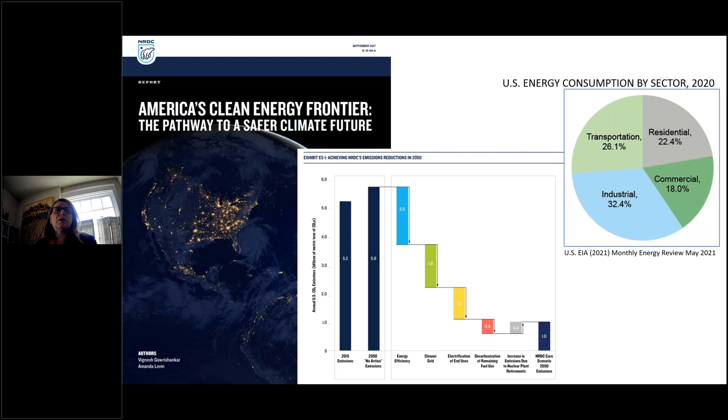So 90.2 is the residential code, or standard, and that's the pie that we're looking at. You can see it is very important to the overall greenhouse gas and climate change initiatives that our country and actually the globe is working with.

If you look at our energy code, and the yellow is the residential code here, I want to show the timeline because it shows the world in which we developed 90.2 in, because you'll see it took quite a while to get to the 2018 code.

So the yellow curves here are the energy code. You can see that it gets more efficient in fits and starts. It'll go for multiple years as a plateau, and then it'll drop a little bit, and then it'll drop some, and then it goes straight for a while, and then it'll drop, and then it'll go straight.

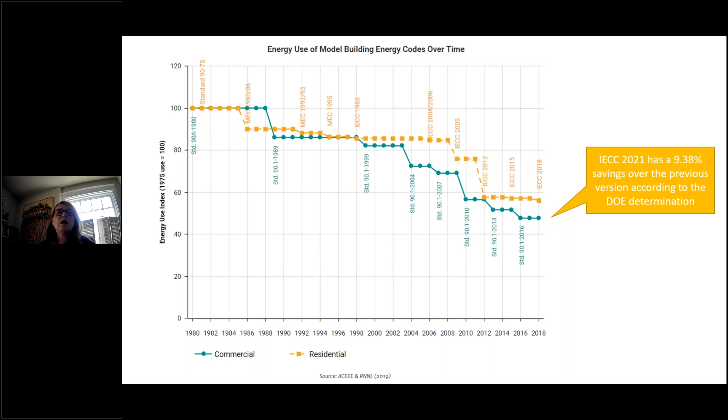We had our last, actually the 2021 code had the DOE evaluation of that code show a 9.38% savings over the previous code. So when we went from 2018 to 2021, we had another drop. So we are getting more efficient over time, but it's not clear that the rate at which the base energy code is becoming more efficient over time is going to lead us to get where we need to be.

And IECC basically put together this Leading the Way for Energy Efficiency document in the last year, and they talk about the intent of the code. So we have an energy efficiency minimum code, and then additionally, they want to, in their codes, provide jurisdictions with additional requirements so that they can lead to zero energy buildings by 2030.

And it's not clear that the base code will get us all the way there. So we're looking at above code standards, more energy efficient programs to do that. And so we're putting together a toolbox, and 90.2 is part of that toolbox going forward. So that just gives you a little idea of where 90.2 sits in the overall basis of energy codes and standards.

So what was the pathway by which we got 90.2 delivered? 90.2 has been around for a long time, but the last version that was published was 2007, and it was not used very often, which is a charitable way of describing it. It was sort of Me Too, didn't really provide any leadership or above code incentives for the industry.

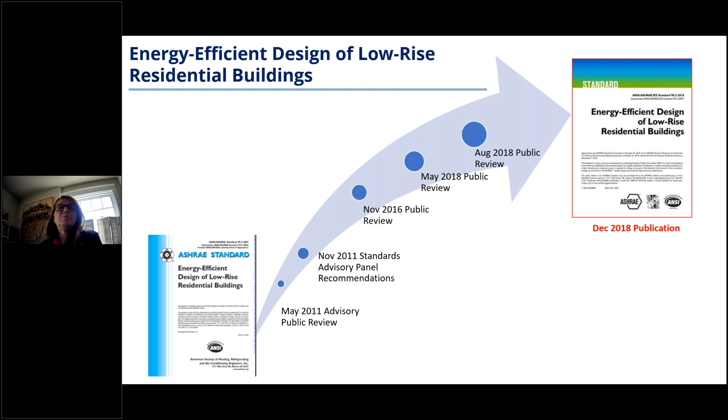And what we ended up producing was the 90.2 2018. And I'm going to go through what's in this, what we call the leadership standard, and then at the end I'll just review how it met those recommendations or how we pursued those recommendations in terms of where we're going with this.

And the main goals is that we wanted a leadership standard, we wanted it to be flexible, and we did want to have cost effectiveness involved in the criterion setting. So what the standard looks like, this is basically the design of the standard in terms of the contents of it. It's set out like, and I'll go through this again, there's a couple of things in there. It's got the basic requirements, it's got some appendices that are normative, some appendices that are informative, actually quite a lot of informative appendices that help with the implementation of the standard, including things like an informative example site inspection checklist, etc.

So if we look at the purpose of the standard, it didn't really change. It's still, the word minimum here, it's still written as you can meet this or exceed it. So it's still written as a minimum performance requirement, but it's not necessarily the code minimum. It's just the standard gives you, have to do this level or better in the way that it's written.

And one of the biggest changes is that manufactured housing was no longer exempted. In 2007, manufactured housing was exempted from 90.2, and it's no longer exempted in this. In fact, we are, as a committee, actively pursuing the specifics of how manufactured housing can benefit from 90.2 as a stretch code for manufactured housing, and there's some efforts going on in that area right now.

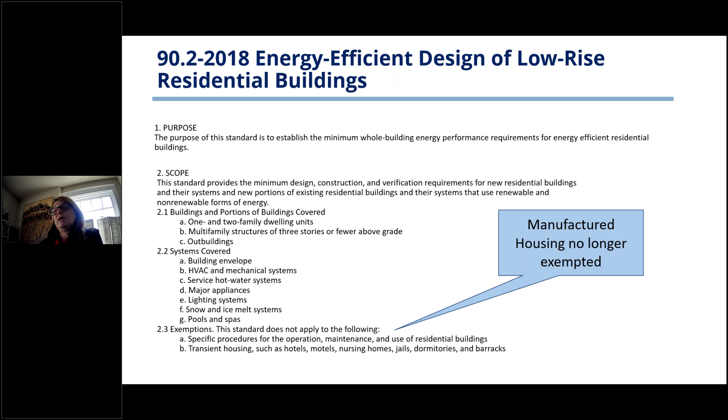So as we look at again back at the definition outside of the scope, or at the table of contents, you notice there's performance requirements. There's some additional specific sort of prescriptive baseline requirements, but it's mainly a performance standard, and it's performance standard based on an energy rating index.

And then the way we put flexibility into this standard was to put into the appendix a procedure for generating prescriptive paths based on these performance requirements, and then an example of one with NAECA minimums for the mechanical equipment in there. And so the idea, and I think this is really important for an area like Alaska where you may have different criteria that you want to use. So instead of having performance criteria, prescriptive criteria, you can use the procedures and the performance requirements to actually generate a prescriptive path that meets the regional concerns of your area, the climate.

I mean, things are designed in climate zones anyway, but the type of building that you do, and also if there's a particular method of construction, you can actually define a prescription path that is sensitive to that particular method of construction. So we felt that it made it prescriptive, it made it very flexible, because you could actually develop the prescriptive path that fit the situation you were in the most.

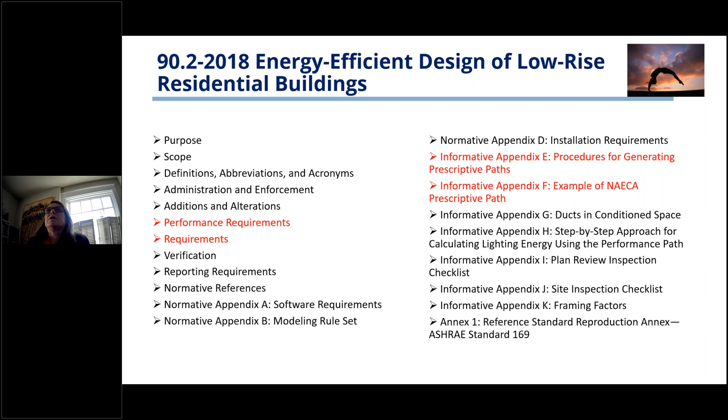So the residential performance did end up being 50% more energy efficiency than the 2006 IECC. The performance is based on the RESNET energy rating index. As originally released, it was on 2014 with Addenda A and Addenda E modifying it. This is when it came out in 2018. It has since been updated to the more recent version of 301 through an addenda. I'll mention that later. But when it first came out in 2018, this is what the performance was based on, and it was based on an energy rating index.

Energy rating indexes, I'm pretty sure you know, are similar to a HERS index. They're slightly different. In the HERS index, so the performance is based on that. We do have some exceptions added into the rule set that is used in RESNET 301.

Some of the addenda mentioned here came out of developments we did in 90.2, and they were added as addenda into RESNET 301, so we just adopted the addenda. But we do have some changes to the rule set, the majority of which are in the lighting section.

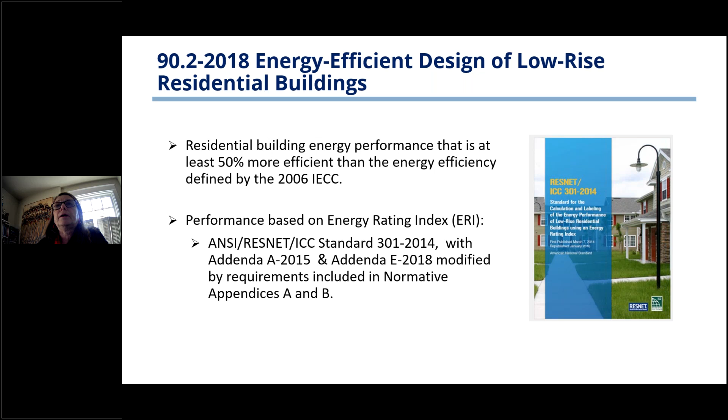It's basically an ERI type scoring performance criteria. This is how the ERI indexes compare to what is in the code. So these are the numbers, the maximum ERI score to meet 90.2 2018.

You can see they're significantly lower than 2015. The 2018 actually went up from 2015 in the ERI pathway. 2021 went sort of back to the 2015 levels, so we're still significantly lower.

And then there's an appendix in the 2021 that goes towards net zero energy, and there are some complications on using it because these are the numbers without solar being used, but you can see they are the same numbers that are in 90.2, and then you use solar, or renewables, not just solar, to get it down to net zero.

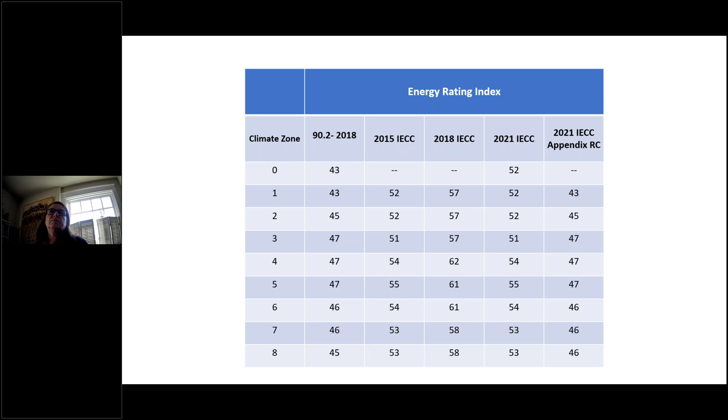So you can see that the 90.2 ERI rating is basically the type of rating that we are using to bridge that gap between a code minimum and a net zero energy building.

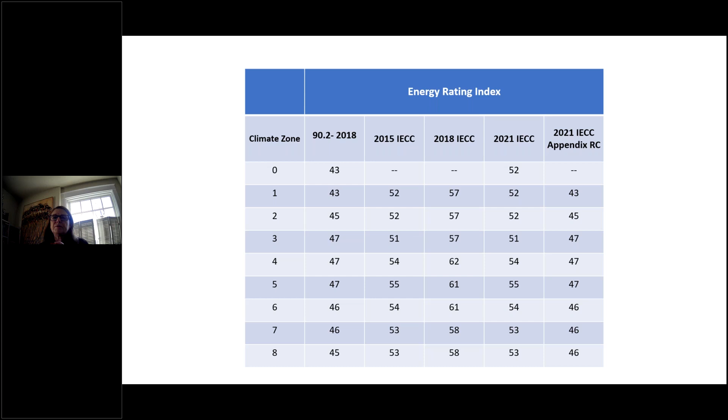So some of the additional requirements that are on top of this ERI - these were things that we felt needed to be done in addition, just to help get you to the ERI and give some minimum backstops to make sure it's getting there in the best way possible. So these are more backstops and baselines than anything else.

For the building envelope, we do have a backstop on air leakage and building thermal envelope insulation levels. And then there's a mandatory verification of insulation installation and verified air leakage. There's a number of additional standards referenced, mainly to do with air leakage testing, and the installation requirements are in a normative appendix.

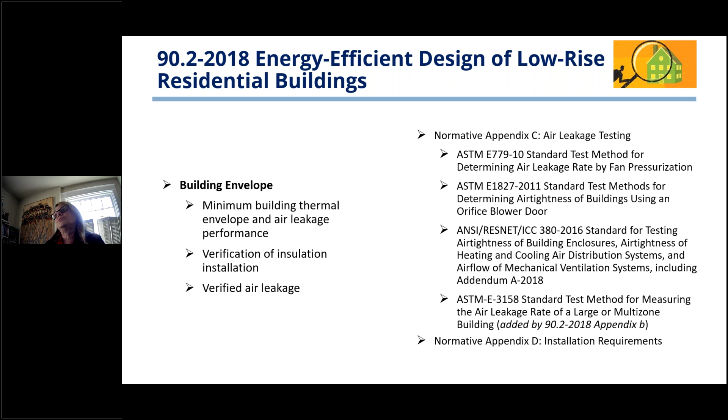So these are required, and they are around verification to make sure the building envelope is built as you design it. For mechanical systems, there's proper sizing and verification of the duct system performance required. There is a requirement for all ducts to be within conditioned space, but they do have an allowance for buried ducts.

And there's a requirement to HVAC design and requirements for design, installation, commissioning, and verification. These are mainly through the various ACCA manuals, and you can see once again the list of required various referenced standards or manuals in terms of quality installation verification as well as design for the mechanical systems.

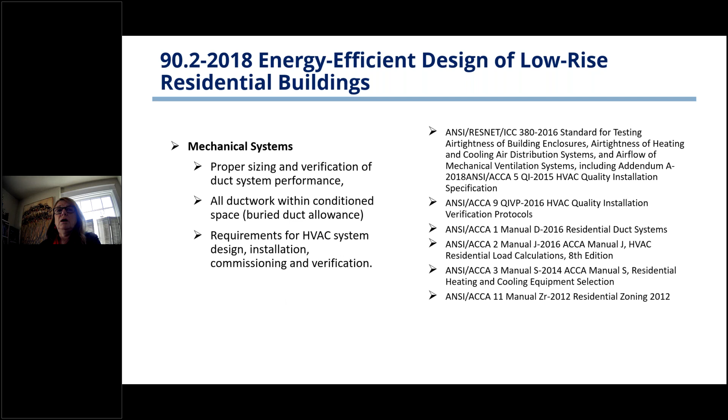In addition to the HVAC mechanical systems, plumbing system design and insulation levels and controls are required. So you want to minimize pipe length from the water heater to discharge points, and verify that the water heating systems actually match what's in the proposed design. So again, verification, some additional requirements that did not fit cleanly into the ERI criteria.

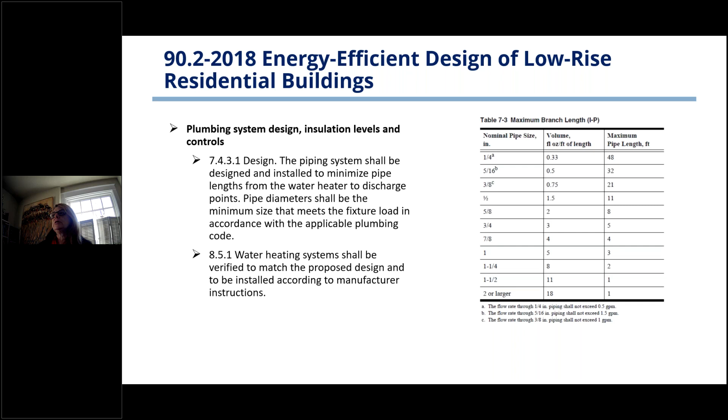For indoor environmental quality, we didn't want to actually put requirements in there that weren't elsewhere, but we wanted to make sure the buildings would have a good level of indoor environmental quality. So we referenced Standard 55, Standard 62.2, and Standard 62.1 for common spaces and multifamily, and then also have the illumination quality, which we are actually working on to make clearer in the upcoming addenda.

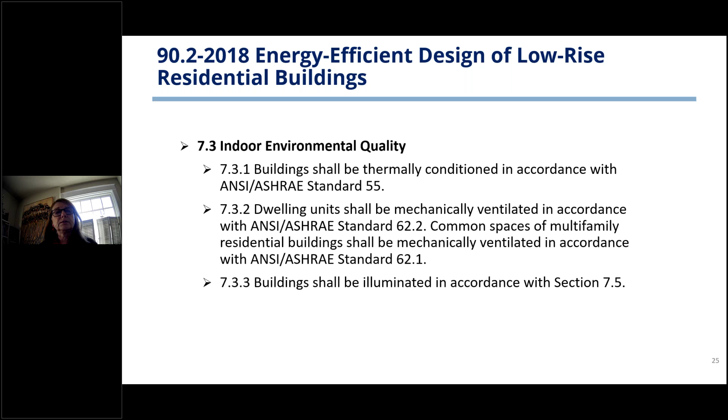And so that gets us into lighting systems. The lighting systems have revised modeling rules for quantifying residential lighting energy, and this was the biggest change from the RESNET 301 rule set, with some revised modeling rules on lighting.

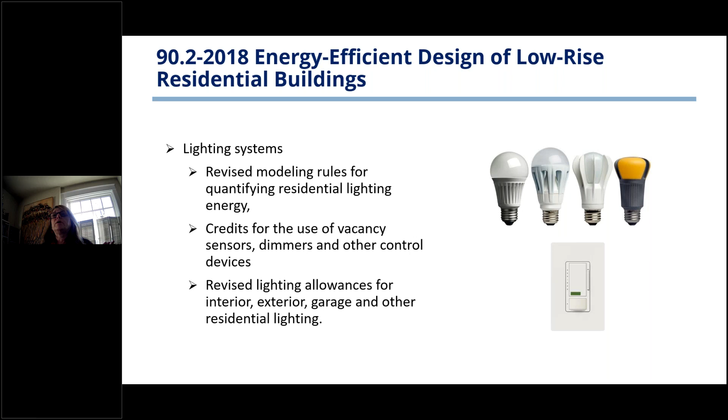There are credits for the use of vacancy sensors, dimmers, and other control devices, and some revised lighting allowances for interior, exterior, garage, and other residential lighting. So it's quite comprehensive as a standard.

Also, one of the things we wanted to do: we allow on-site power production to meet the ERI requirements, that is, if it's not being used - in that IECC addenda, that was an addition.

But within the standard, you can use on-site power to meet the ERI requirements, but there are building thermal envelope insulation and air leakage backstops to make sure that you are looking at making the building efficient first and then adding the solar on afterwards, because that is the best way in terms of the longevity of the energy efficiency and really getting the energy efficiency down for the product.

I got a question. Yeah. In Fairbanks, there are 3 months out of the year that tracking solar units can't power their tracking motors. So how would somebody in Fairbanks meet these site power requirements? See, you wouldn't, you might not use them. I mean, you're not required to have site power. I see.

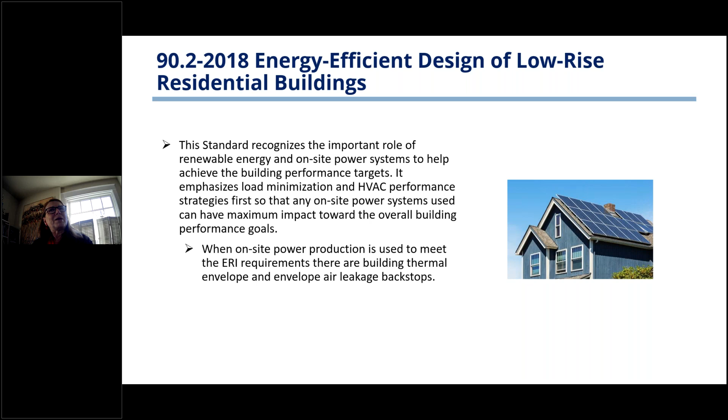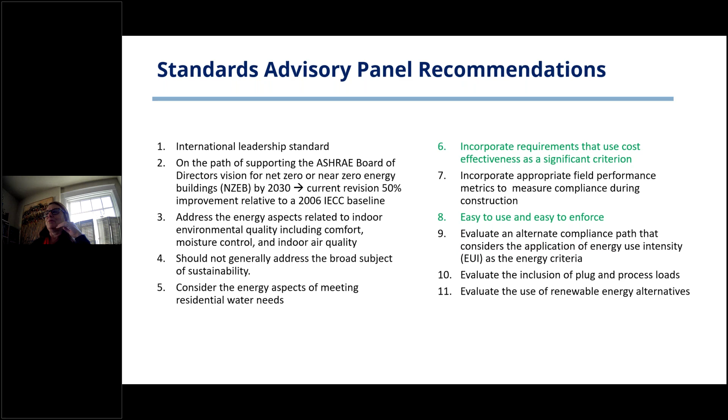So to establish cost effectiveness while maximizing the energy efficiency, we used a life cycle cost analysis, and we used specific adopted economic parameters. As a committee, it took us quite a while to get these economic parameters set, and they are quite conservative. Adopted national average energy prices. Those energy prices may have changed, so we may want to redo this cost effectiveness or do it regionally, but that was how we got there initially.

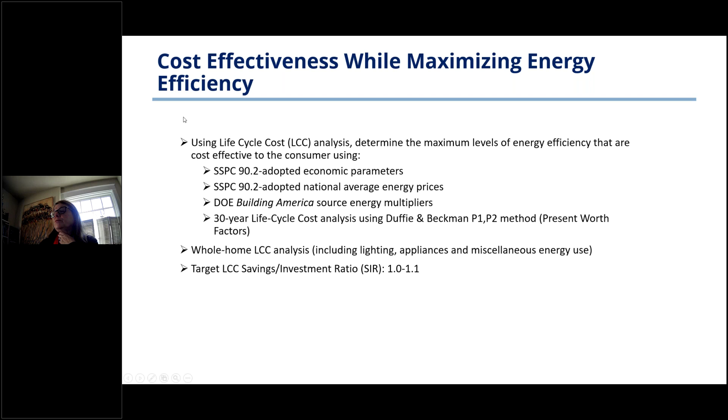We did use the DOE Building America Source Energy Multipliers and looked at a 30-year life cycle cost, and you can see the method used was a whole home LCC analysis, including lighting, appliances, and miscellaneous energy use. So there were some schedules put in there on miscellaneous energy use and appliances, and they targeted a savings to investment ratio of between 1 to 1.1. So what does that mean?

Well, you're going to get a curve, and you're going to start getting percent cost savings on life cycle costs going down as you go up in energy savings, and then the life cycle costs will start going up. We did not target the minimum life cycle cost. We said we wanted it to be in the 1.1 to 1 range. So we are at the most energy savings you can get without increasing the life cycle cost as opposed to the minimum total. So it was maximizing energy cost savings while being cost effective. And that was the philosophy behind the cost effectiveness study that we did.

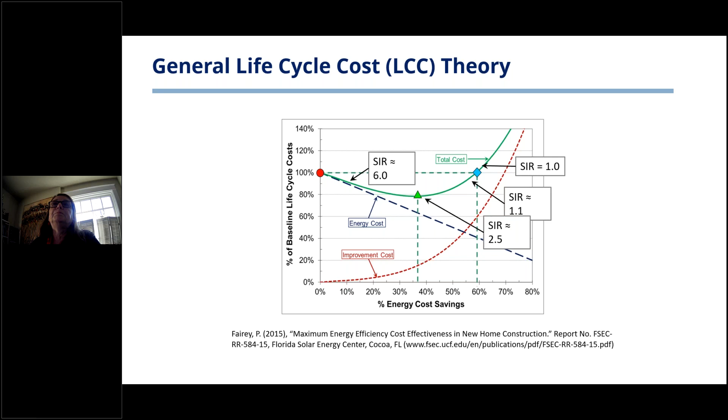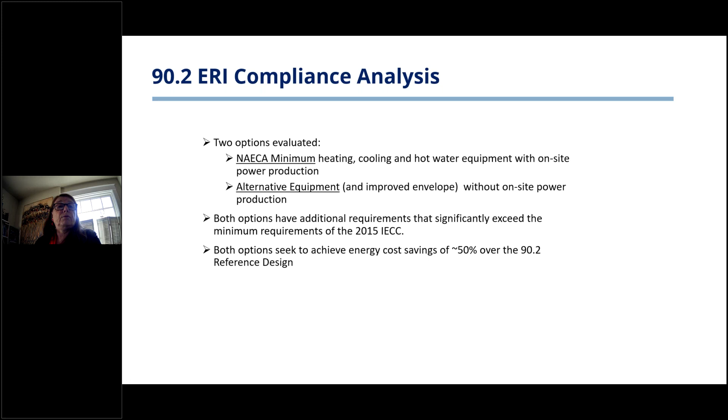And there were 2 evaluations looked at. One was an NAECA minimum. This did have on-site power production, and then an alternative without on-site power production to see if we could look at cost effectiveness under those 2 somewhat divergent scenarios. And you can see we were targeting 50% over the reference design. And these are the climate zones that we did these in.

And you can see with PV and with no PV, and then what the recommendation was for the value that we got. So with PV and without PV, the energy rating index may have been quite a bit different, but we picked the middle one as the recommended compliance ERIs. And we did this with a number of scenarios. But it was basically to determine that these were achievable numbers, not necessarily going to give you the minimum life cycle cost for everything, but they were achievable in the cost effectiveness range.

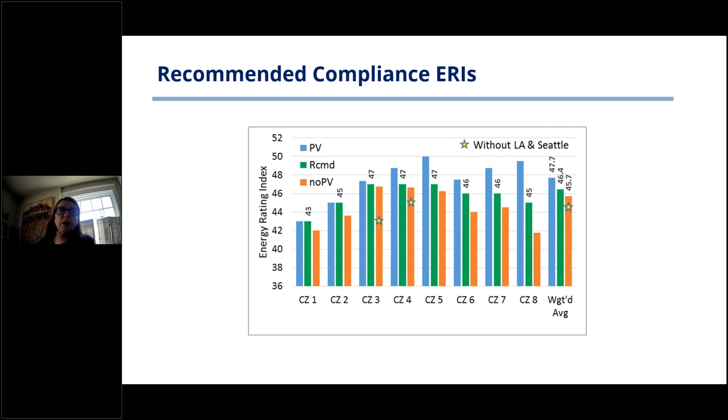Then when we move to the idea of easy to enforce, you look at, well, what does easy to enforce mean? Well, one thing you can look at is what's happening with code officials. Basically a lot of them are retiring and leaving the business, and a lot more are going to over the next 10 years. And this is from a demographic survey from 2014.

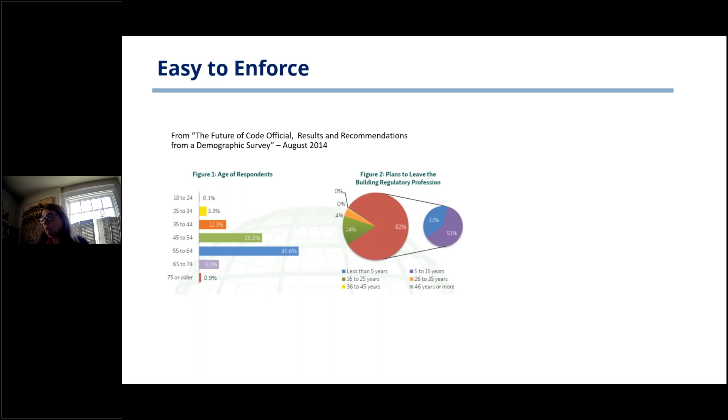So with the ease to enforce, you wanted to have enforcement in a way where you were already compensating for, say, the loss of some of the code inspectors. And so that is one of the benefits of having it an ERI-based code, because there's already an IECC HERS compliance specialist designation. So ERI is already an existing pathway in the code.

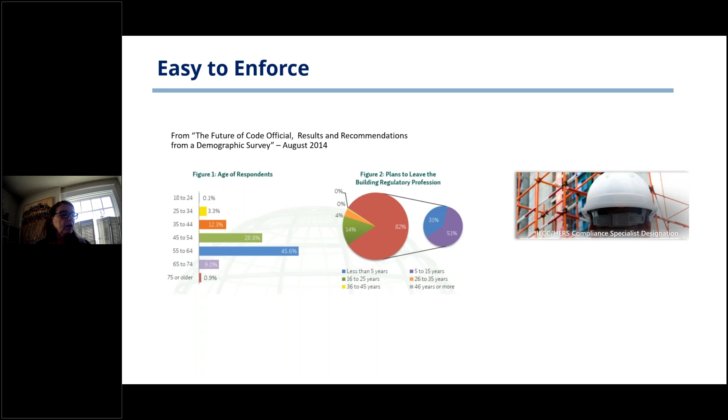You've got these third parties that are qualified, that already have a qualification designation within IECC. HERS raters are known. This is a similar type of system, so it makes it a lot easier to enforce. Having clear verification requirements that are referenced to standards also makes it easy to enforce. So that was how we were going to make it easy to enforce. We weren't starting up with a totally new system. We were working off what was within the industry at the moment.

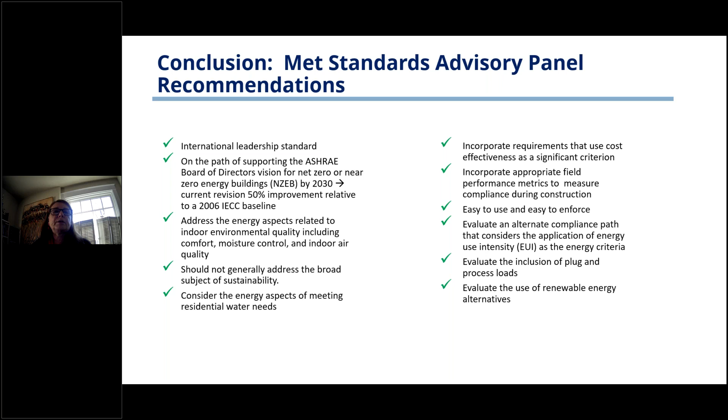And so in conclusion, we met the standards advisory panel recommendations, not all of them 100%, but we went there at least partially with all of them, and I can answer more questions about those when we finish. But we felt really good that we were able to include so many of the recommendations in the rewrite. It took a long time, not without a lot of discussion and in some cases maybe controversy, but we moved forward and did meet those recommendations, or stepped up to the plate on them.

So what did we do since the publication, which was in December of 2018? We went right to the end of the year in 2018. What's on the horizon and what have we done since then? One of the things that we've done this year, and it hasn't been evaluated by the committees yet, is we proposed, because the numbers were already in the 2021 code, for this net zero residential energy appendix in the IECC, replacing just using the ERI numbers with using 90.2, because 90.2 provides a lot more information on how to do it, how to get verification, and we left in a lot of the things around how you validate the renewable energy sources.

Basically we took it from just a table to saying we're proposing that ASHRAE 90.2-2018 will make this appendix actually more doable for the jurisdictions that decide to adopt it. So we'll see whether or not the consensus committee agrees with us, but we are putting it forward as basically the stretch code part of that glide path, consistent with what I showed in the beginning, of IECC looking to have these appendices which help individual jurisdictions.

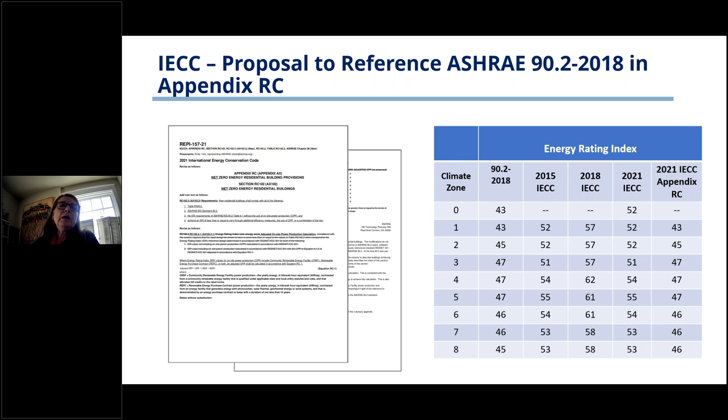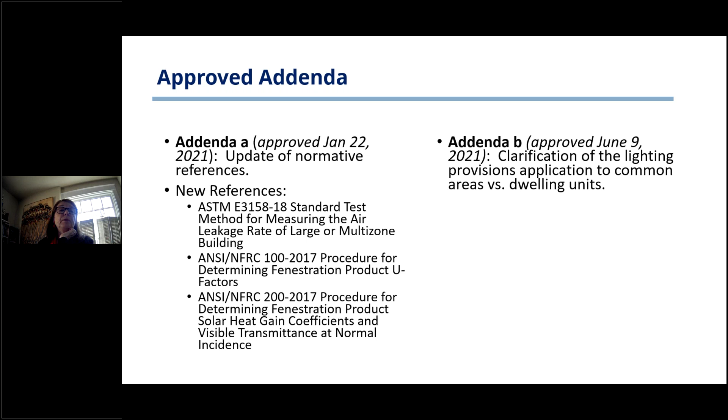We've also moved forward on improving the standard. This is sort of maintenance. We've updated the references. Because we were somewhat new coming on the scene, we were a little out of sync with some of the references, so we're trying to get that in sync with revisions to the references, updated them, added some new testing. We did a clarification of lighting provisions, applications to common areas versus dwelling units in multifamily, and where you use what criteria. And then we have an addendum that's out for public review until March 21st. So if you have a comment on this, please give us a comment.

And there are some very important things in this, because we are looking at revising the title consistent with an expansion in purpose and scope of the standard. The first thing is it's currently low-rise residential buildings, and we are looking at expanding this to all residential buildings, because you can basically evaluate by a combination of dwelling unit and common space, and so that gives the ability to use the same standard over all residential occupancies, multifamily as well as single family.

This is similar to changes that we've seen coming through in 62.2, and what happens is multifamily sort of falls through the cracks between commercial code provisions and residential single family code provisions, and this is an attempt to bridge that gap.

We are also looking at not just low energy consumption, but also at carbon and low greenhouse gas emissions, adding that to the standard. And RESNET has started looking at doing carbon as part of an evaluation index, a separate index within RESNET 301, and so we are looking at that. We think that carbon is one of the criteria that are going to need to be followed, and if you want to stay in a leadership position as a standard, you need to actually step up to the plate on that. How we do that exactly is what we're still working on.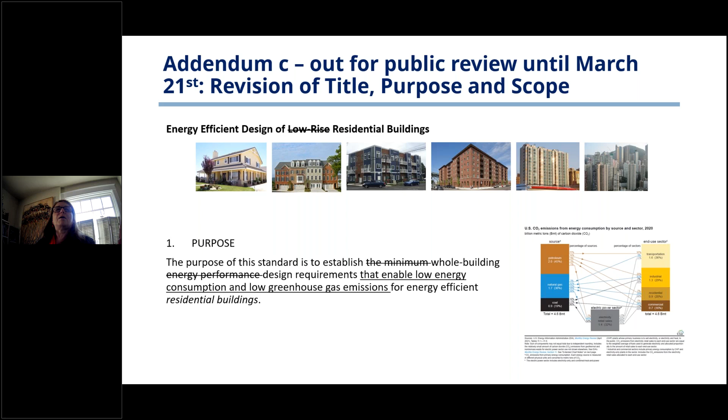So this title, purpose, and scope is to some extent aspirational and somewhat a work in progress, but if you want to comment on it, we really would like comments on the title, purpose, and scope change. You can see the scope change. Most of this has to do with moving from just low-rise residential to multifamily, but we also are looking at covering some connected controls, so connected thermostats and controls, as well as others. The rest of it is some wordsmithing for clarity. We already covered the use of renewable energy systems, maybe not the energy storage systems themselves in detail. So that's there.

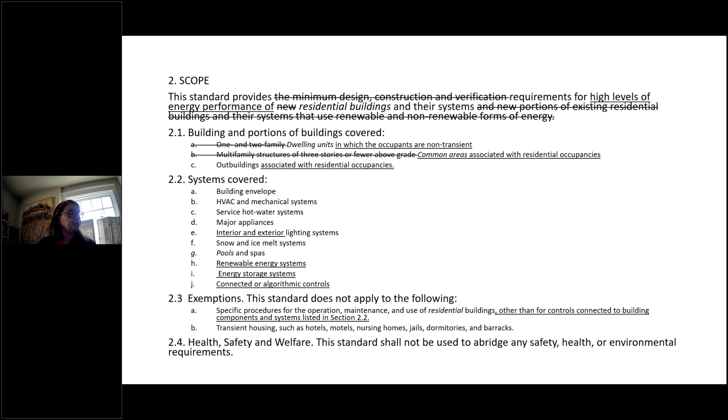So with 90.2, we attempted to answer what a leadership code is with the criteria that was in there. It's something that's on a pathway to net zero energy buildings, including aspects that aren't just the HVAC, building envelope, and lighting, the traditional ones, but trying to look at some of the other energy use aspects, and to address implementation, validation, ease of adoption, and the benefit of the cost. That's what we are trying to do with 90.2. We produced it as a committee, and I think it's a fairly good product. From a personal standpoint, I'd like to see it considered more in different regions and states going forward.

So I will finish there and go to questions, but I just want to acknowledge SSPC 90.2. I was chair for about 6 years, and I worked with some amazing people. The past and current chairs of 90.2: the two chairs before me, Merle McBride and Philip Fairey, and the current chair is David Goldstein. Philip and I are still members of the committee. There's a commitment to 90.2 moving forward. I'd also like to acknowledge the ASHRAE Residential Building Committee, who worked with me on becoming a distinguished lecturer and presenting on 90.2. And finally, thank you for your attendance, and I'll go to any questions.